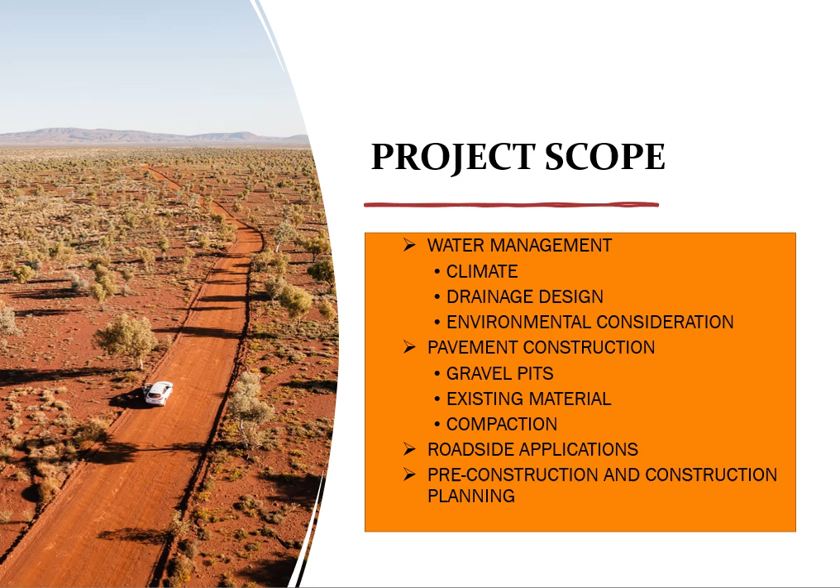This presentation will delve into the project's water management strategies, the usability of gravel supplies, environmental considerations, and detailed construction planning to ensure both infrastructural integrity and environmental preservation.

In this phase of the investigation concerning the proposed road corridor, addressing water management considerations has become essential. The climatic conditions of the Karijini region, characterized by a combination of tropical and semi-arid climates, present unique challenges. According to the information obtained from Wikipedia, summer days in this region often see temperatures soaring above 40 degrees Celsius, while winter nights can bring frost.

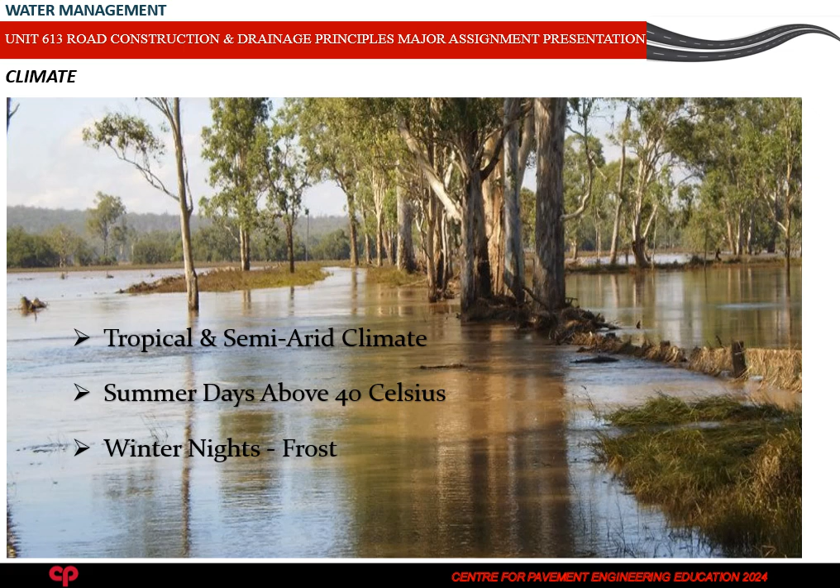These extreme weather conditions necessitate effective water management strategies to ensure the durability and safety of the road infrastructure, highlighting the importance of efficient drainage systems, water retention methods, and the use of materials and designs suitable for such a harsh climate. The median rainfall data collected from Auski-Munjina Roadhouse, Hamersley, and Hooley stations, as shown in tables, highlights the need for careful planning of the road construction phases.

Given the project's restricted 6-week construction schedule mandated by the Department of Biodiversity, Conservation and Attractions, organizing the construction during optimal weather conditions is crucial. Heavy rainfall, particularly common in January, February, and March, often halts highway construction due to the saturated soil conditions that impede quality control measures such as surveying and in-situ tests.

Proper compaction is critical, with the guideline advising placement of granular materials slightly dry of optimum moisture to avoid overcompaction. Considering the rainfall patterns, November and the first half of December post-tourist season are identified as the ideal months for construction.

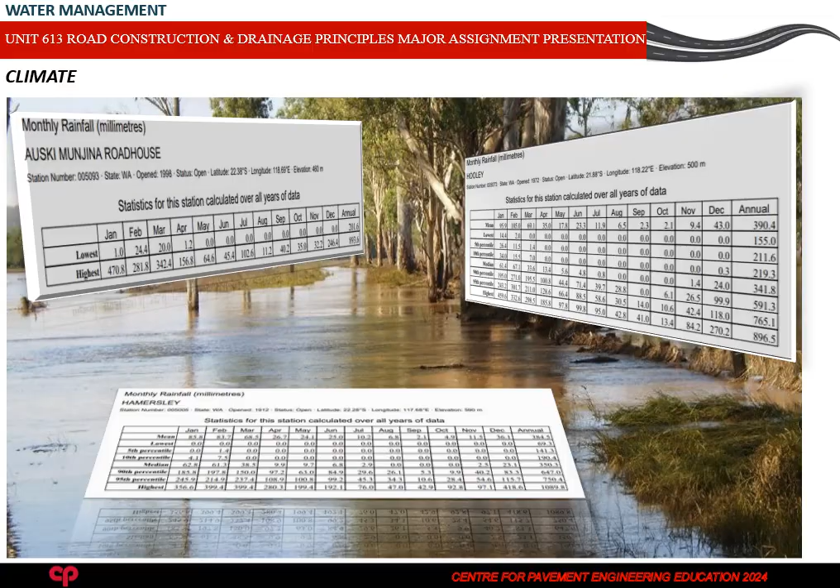The practice of water management in transport corridors focuses on 3 key elements: groundwater movements under the corridor, transverse water flows across the corridor, and water movements along the corridor. These elements should be managed together, though this is not always done. For roads, railways, and airports, groundwater is the most critical factor as it affects soil stability and foundation integrity.

Transverse drainage is crucial in rural areas, while managing longitudinal water flows such as stormwater removal is more important in urban areas. The relative importance of these elements can vary depending on the transport mode and location. Within the scope of the project, we discuss our approach to moisture control systems during the construction and service stages of our project. We have determined the catchments by analyzing the topography of the project area.

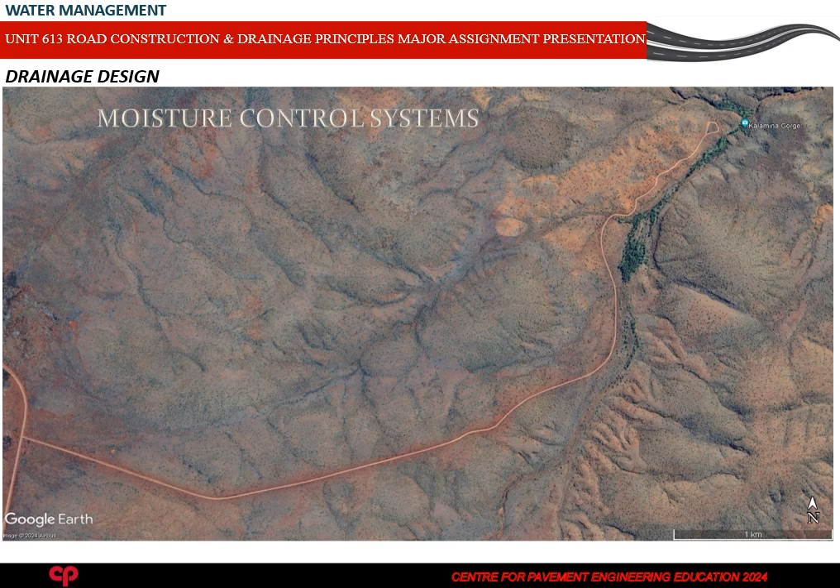As part of the project scope, we need to implement 7 culverts. These culverts are critical for channelling water under roads and must be strong enough to support both construction and highway traffic loads, along with the loads from the road formation itself.

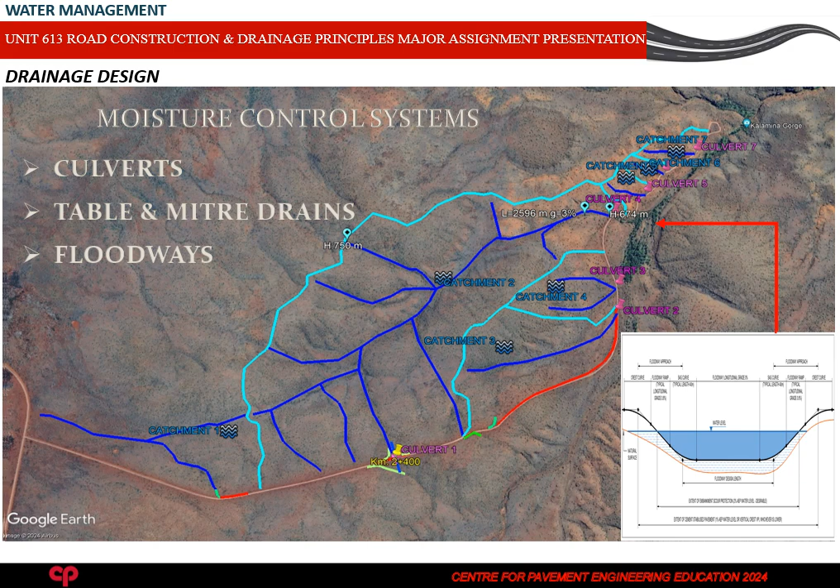Throughout the road construction and subsequent service period, it is essential to use appropriate drainage structures to prevent erosion and pavement damage. To this end, we are employing table drains and mitre drains to effectively manage surface water and groundwater, keeping them away from the corridor. Also, it has been required to design a floodway to support the hydraulic capacity due to the large quantity of water collecting via the long stream.

Another key aspect of our project involves managing water flow from catchment 3, which discharges into an existing natural stream running parallel to our road corridor and close to the elevation. Excessive rainfall in this section could significantly impact the road corridor during both the construction phase and future use. To mitigate this risk, we have designed table drains along the corridor that will tie into the proposed culverts, ensuring efficient discharge into the crossing stream.

Within the scope of our project, we have identified several locations where these drainage structures, table drains, mitre drains, and culverts need to work in tandem to manage water flow during construction and subsequent service periods. These critical sections are generally located at the lower points of the corridor.

As determined by the topography, we are designing culverts to facilitate water crossing and are also incorporating proposed drains to collect water flow from the related catchment. This water will then be discharged through the culverts into the natural stream bed, ensuring effective water management throughout the project's lifespan.

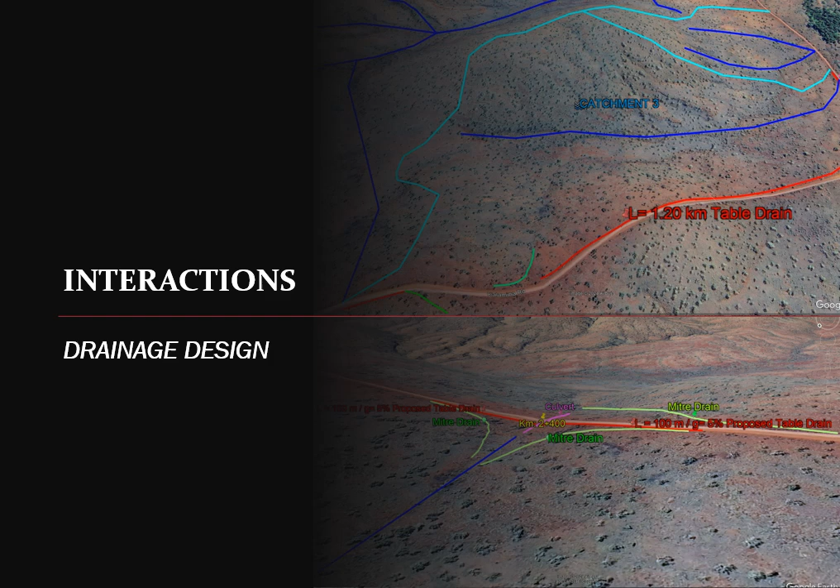As discussed previously, one particular area of focus is culvert 4. This culvert needs to handle the flow rate from catchment 2, the largest catchment in our project, covering an area of 75 hectares with a 3% water flow grade. Given the region's tropical climate, which experiences heavy rainfall during the wet season, we face significant challenges.

Using a bridge to address these hydraulic demands would be very costly, requiring the lifting of vertical alignment, leading to high construction expenses. Therefore, we have determined that a floodway design is the most ideal solution for this section of the road, balancing effectiveness and cost efficiency.

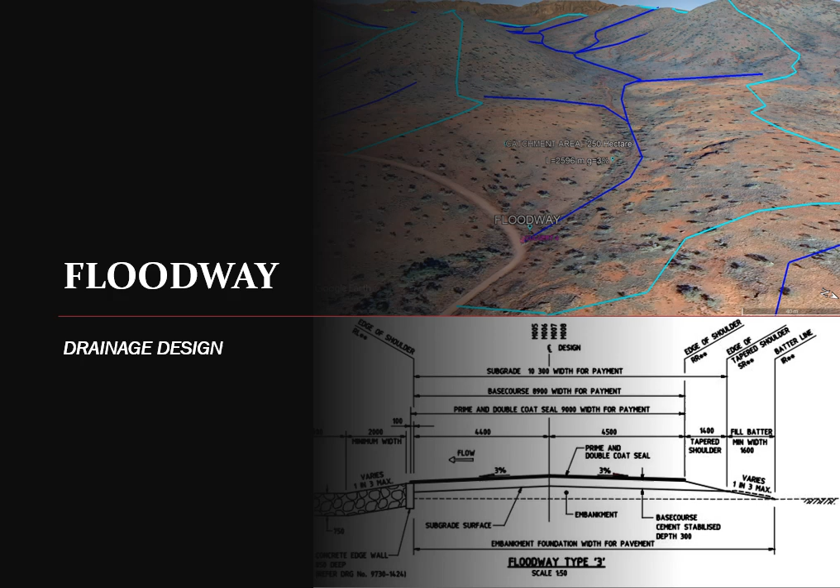For the floodway design, sight distance, signing for traffic safety, proper pavement structure, and road geometry are paramount. It has been required to calculate the water velocity for the floodway upper structure. As a result of this, it has been determined to use the Type 3 floodway typical cross-section of Main Roads, Western Australia.

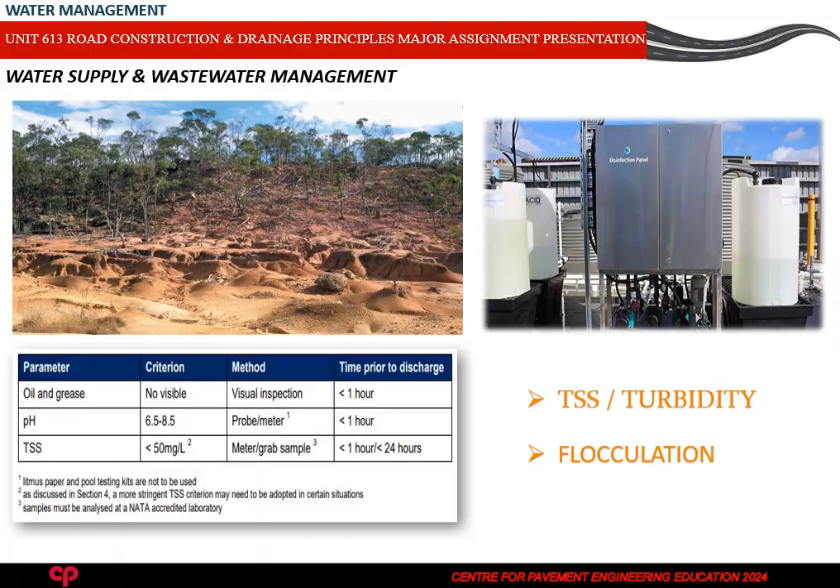In the scope of the project, pavement design has been determined with 150 mm sub-base material with minimum CBR 30% and 100 mm base material with CBR 80%. Also, this report has discussed the select fill material applications and design considerations. Considering the supply of the materials, 2 gravel pits have been determined around the area of the project, which are Pit A and Pit B.

The project involves utilizing gravel reserves from 2 pits for pavement materials, Pit A with 9,000 cubic meters and Pit B with 7,000 cubic meters, for constructing the 6-kilometer corridor. We need approximately 4,200 cubic meters of base material and 6,300 cubic meters of sub-base material. Pit A is 7 km from the project start, while Pit B is 22 km away.

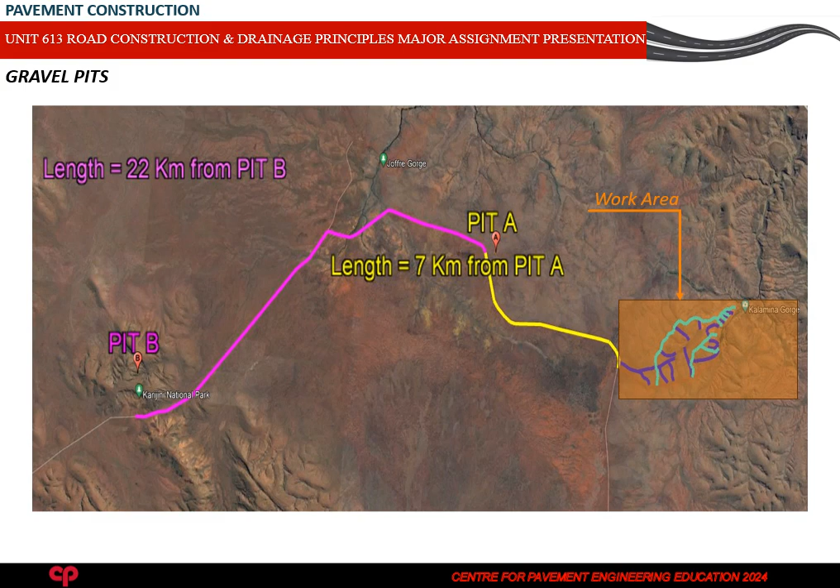The road between these pits poses a challenge due to its horizontal and vertical geometry, leading to higher vehicle operation costs and potential delays. The Department of Biodiversity, Conservation and Attractions has set a strict 6-week timeline for the project. Therefore, we have decided to use materials from these pits for both the current and future road sections, ensuring compliance with Main Roads Western Australia specifications. These specifications require careful assessment of material properties including CBR, plasticity index, and particle size distribution. By strategically sourcing materials, we aim to meet project requirements efficiently and within environmental goals.

Regarding the usability of gravels obtained from the pits, it is required to compare the target values as per specifications. After careful consideration, we have determined that the material from Pit A is suitable for both the base and sub-base layers of our road construction project. On the other hand, the material from Pit B doesn't meet the approval standards set by the government. As a result, most of the base and sub-base materials will be sourced from Pit A.

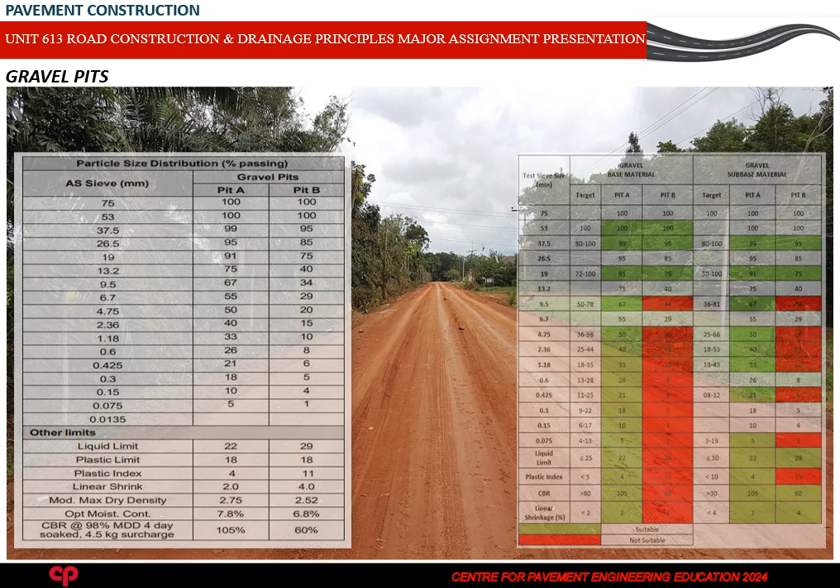This decision is based on 2 key factors: the proximity of Pit A to the project site, being just 7 km away, and the suitability of its material properties. This approach ensures we use high-quality material and maintain cost efficiency in transportation, meeting all project requirements effectively.

This section of our project is part of a larger 37-kilometer road construction effort. Given the material supply restrictions in the region, we have made strategic decisions to ensure adequate material supply for the entire project. It has been determined to stockpile existing road materials, including lateritic cap rock, for use in other sections. For the low traffic unsealed roads, we have adopted the standards from Austroads, which specifies minimum CBR values and layer thickness for U3 class unsealed pavements.

At Kalamina Road, with a peak traffic of up to 100 vehicles per day, we classified it as a U3 type road. This classification requires a 100 mm wearing course and 150 mm sub-base layer. Considering the total volume of materials from the existing road, which has a 7-meter platform, we have approximately 10,500 cubic meters of material available for other sections. This strategic approach ensures we have sufficient materials to meet the needs of the entire road construction project.

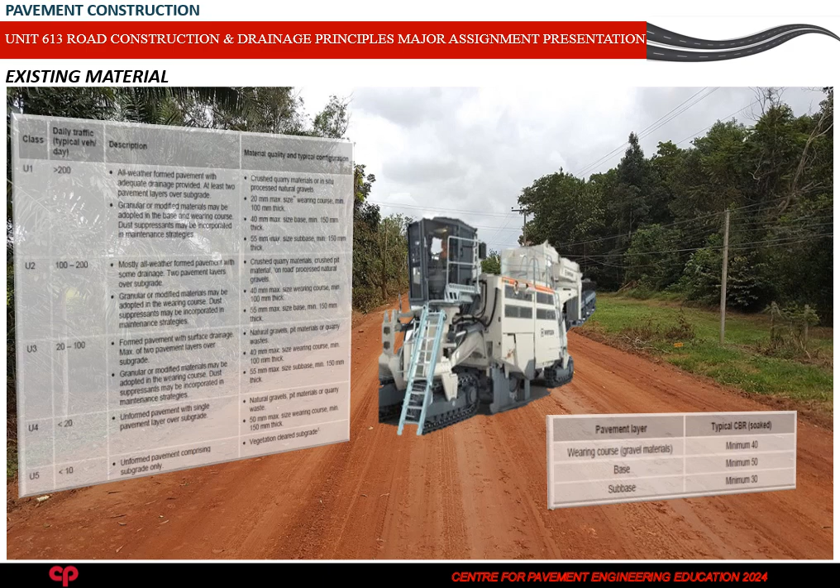As a result of this application, after 250 mm excavating from the existing surface, an additional 75 mm rock surface will be excavated as per the designer's suggestion to use as a base material for other sections of road projects.

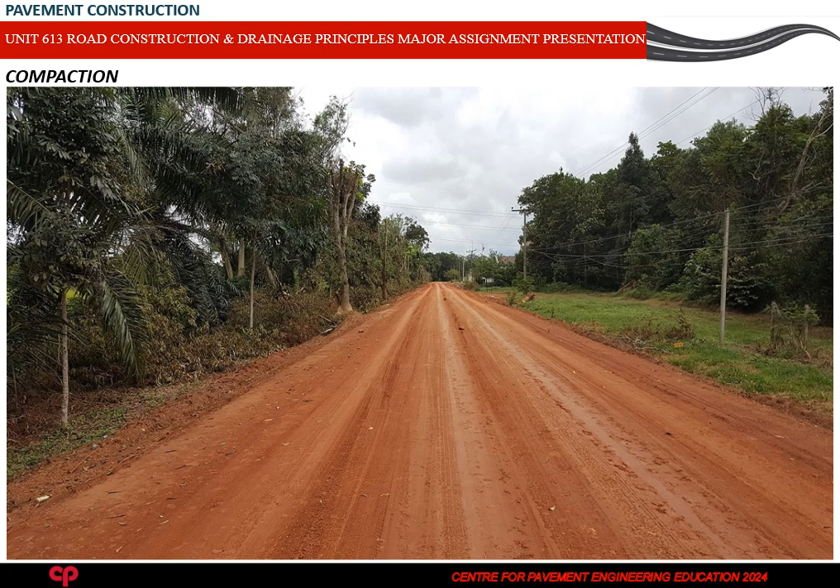Compaction in road construction, especially with granular materials, is vital for increasing soil density by reducing air voids. It must be done at a moisture content between 90% and 110% of the optimum moisture content, with Main Roads Western Australia specifying thorough mixing of gravel, base course and sub-base materials to a moisture range of 85% to 115% of optimum moisture content, followed by 24-hour curing periods.

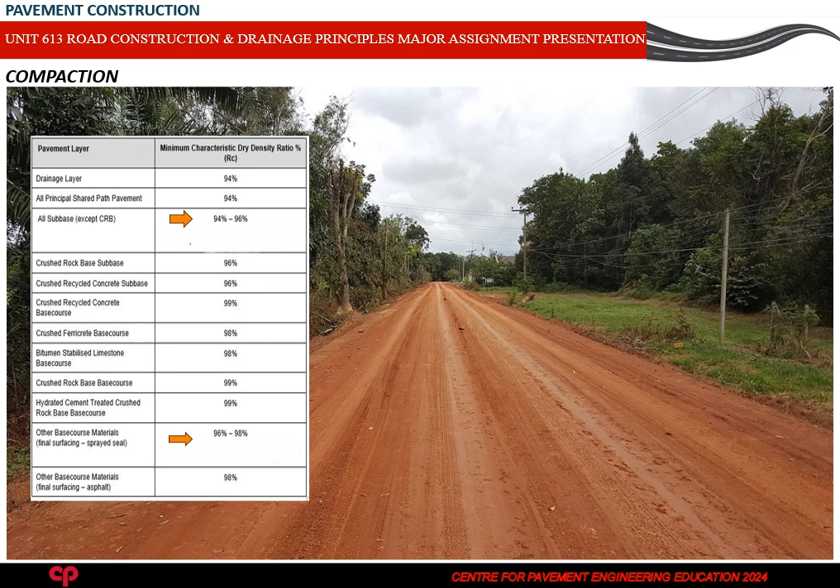For floodway sections, cement-treated base is compacted immediately after mixing, with attention to edge compaction using shoulder materials. The compacted CTB should be smooth, well-graded, and free of defects, with final adjustments made using precise electronic surveying equipment.

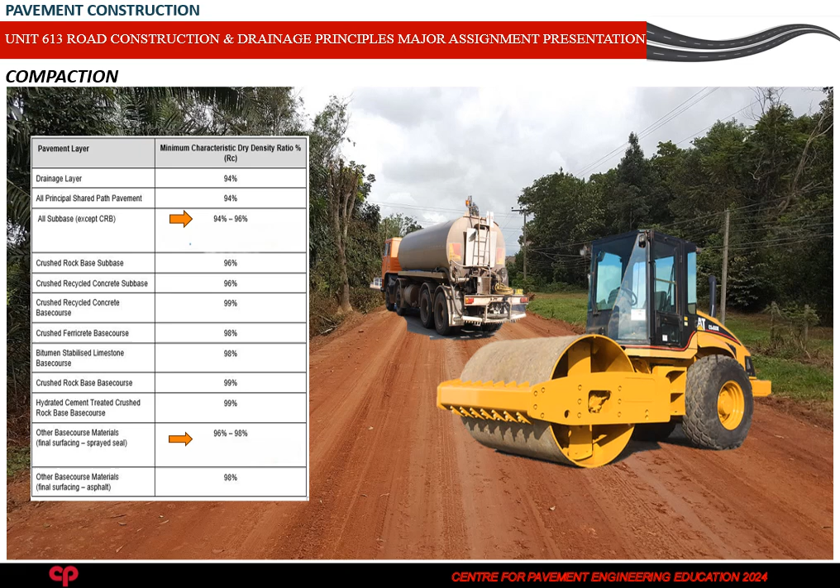The road corridor project in the national park necessitates careful environmental considerations to mitigate impacts on flora and fauna. Key concerns include managing high soil salinity and ensuring water quality, with water management being crucial due to the region's high salt content. Salinization caused by rising saline water tables poses a significant threat to soil fertility and vegetation.

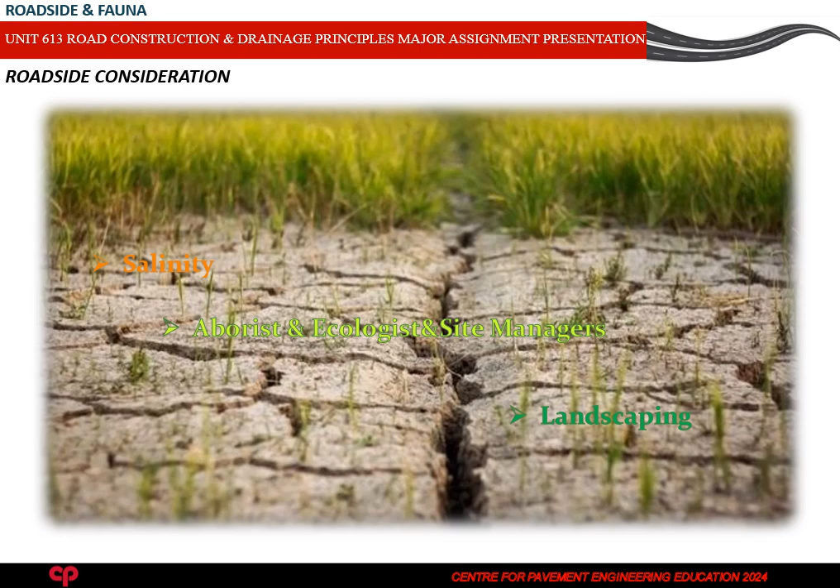To address these issues, an environmental management plan must be prepared, detailing the limits of vegetation removal, protecting sensitive areas, and employing sustainable construction practices. Vegetation clearance should be minimized and planned to prevent erosion and weed invasion, with topsoil from native areas reused promptly. Additionally, site investigations involving arborists, ecologists, and site managers will identify and protect vital flora.

Project areas identify threatened species such as the western pebble-mound mouse, prompting the integration of a fauna and flora management plan into the environmental management plan. An ecologist and fauna spotter catcher will oversee the clearing stage to rescue and relocate affected species.

To minimize environmental impact, the project will use surface miners for vibration-free excavation and maintain all equipment according to manufacturer specifications. Landscaping will coincide with construction to control erosion and establish vegetation, with drainage solutions employing grass seeding, erosion mulch, and turfing.

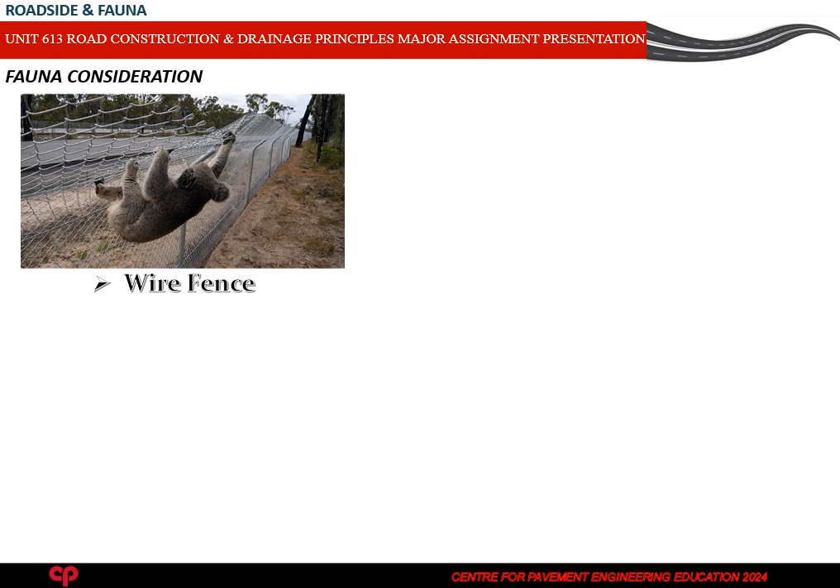Fauna crossings, including rope ladder crossings and log culverts, will be implemented to mitigate habitat fragmentation, support species movement and interbreeding, and enhance biodiversity by providing safe passages for animals, thereby promoting ecological balance and reducing the risk of species endangerment.

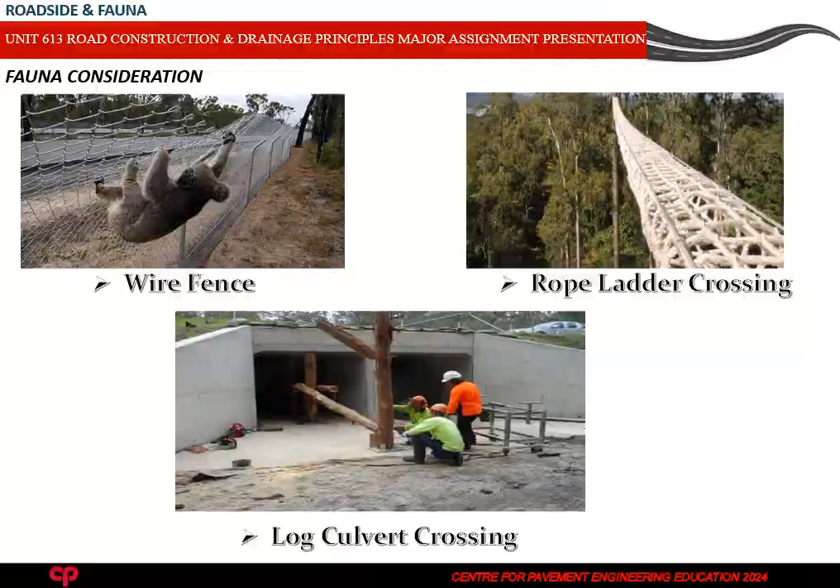Pre-construction and construction planning. The pre-construction process for the Kalamina Road project, constrained to a 6-week completion period, involves an extensive planning stage, including site investigation, plan development, environmental and ecological assessment, stakeholder engagement, design review, procurement, construction planning, and obtaining necessary approvals and permits.

Site investigation covers material compliance, ecological surveys, hydraulic studies, and utility surveys, ensuring minimal environmental impact and logistical efficiency. Detailed management plans are developed to maintain quality, safety, traffic, and environmental standards. Environmental assessments focus on protecting threatened species and managing water effectively. Stakeholder engagement ensures alignment with conservation and cultural values.

Design adjustments and material specifications integrate site insights to enhance resilience. Procurement involves selecting experienced contractors and sourcing high-quality materials. Construction planning outlines activity sequences, equipment logistics, and water management. Finally, obtaining regulatory approvals, including environmental impact assessments and various permits, ensures legal compliance and environmental protection.

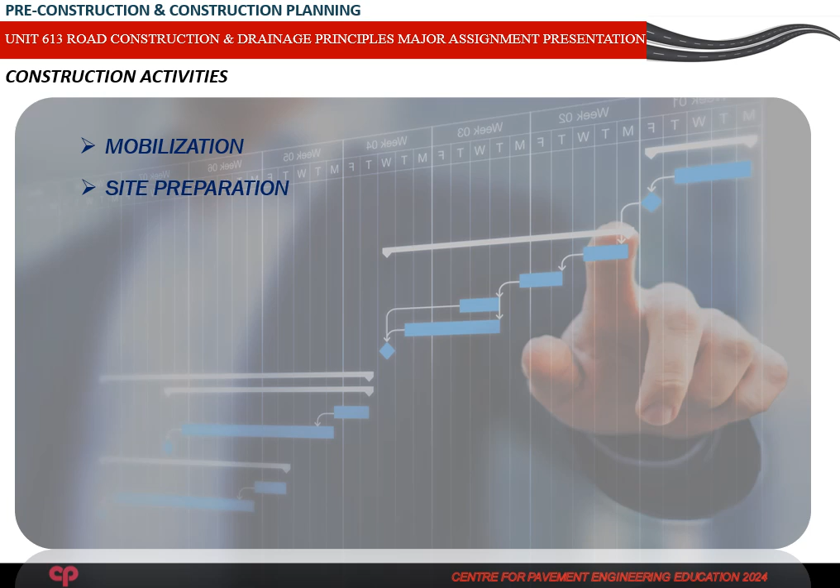Construction activities of Kalamina Road involve a series of meticulously planned stages to ensure timely completion within 6 weeks while minimizing environmental impacts. Mobilization begins with transporting equipment and materials to the site and setting up a construction camp with adequate water and waste management systems. Initial site preparation includes clearing the construction area while preserving protected trees and habitats, establishing temporary access roads and implementing drainage controls.

Drainage and scour protection measures are then constructed, including table and mitre drains and protection in high-velocity areas. Gravel is sourced from identified pits, transported to the site, and tested to ensure compliance with CBR specifications. Floodway construction follows, involving assessments and implementation of scour protection based on water velocity.

Pavement construction includes laying subbase and base materials with proper compaction, applying a seal coat, and constructing adequate shoulders. Finalization and demobilization involve performing finishing works like signage and road markings, cleaning up the site, and removing temporary structures.

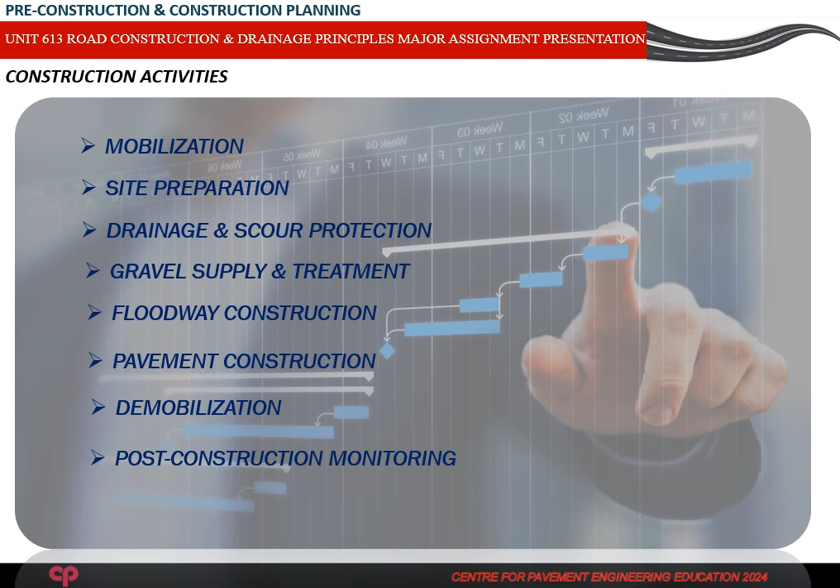Post-construction monitoring is conducted to assess road performance and environmental impact, with any necessary maintenance or adjustments made to ensure long-term functionality and compliance with environmental standards. For the scope of the project, a Gantt chart has been prepared and illustrated in the table.

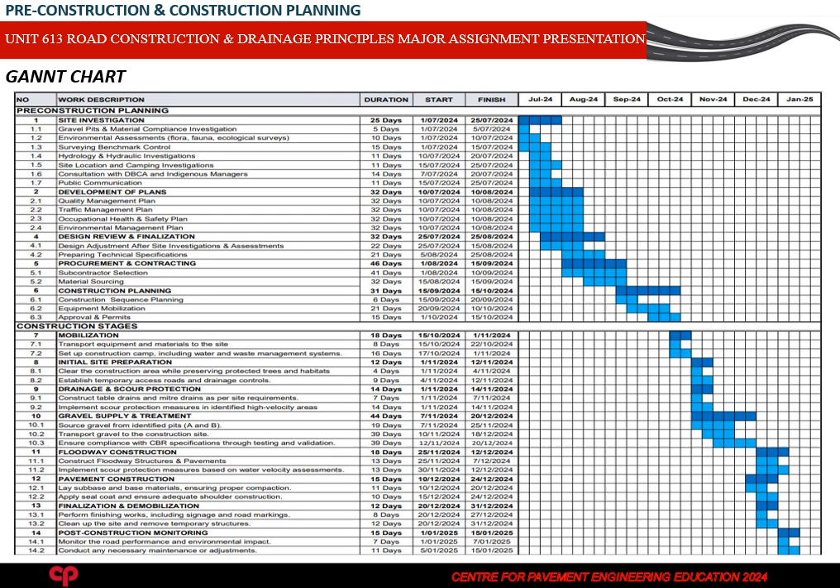For the scope of the project, a Gantt chart has been prepared and illustrated in the table.